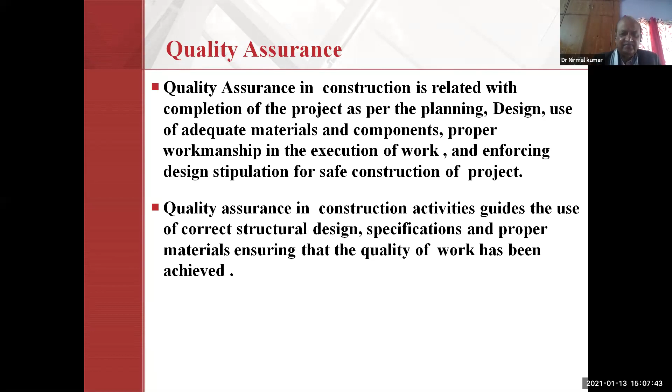Now, workmanship is also a component of this quality assurance, and therefore the role of civil engineers is very important. We are responsible for creating a sustainable world for enhancing the quality of life on this earth. This is our responsibility and our role as civil engineers. We serve society collectively as planners, designers, constructors, and operators for development, creating an environment for the well-being of man and society. Our role is extremely important as it accounts for the overall safety of society in many different facets. Our job is related to making the area safe for the people who live here. We are stewards or leaders of the natural environment and its resources.

We are innovators, integrators of ideas and technology across the public, private, and academic sectors. We are managers of risk and uncertainty caused by natural events like accidents and other natural onslaughts like flood, fire, and earthquake. Our structures should be constructed to sustain all these natural onslaughts to make us safe. We are leaders in discussions and decisions shaping public environment and infrastructure policy.

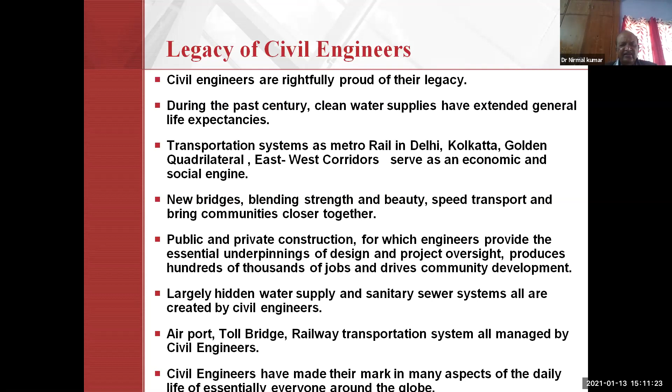In public and private construction, engineers provide the essential underpinning of design and project oversight. We produce hundreds of thousands of jobs due to construction activity. We are also responsible for supplying hidden water supply and sanitation systems, and we have created infrastructure for sanitary and sewer systems. We have constructed airports, toll bridges, and railway transport systems. It is all managed by civil engineers. We have made our mark in many aspects of daily life, essentially touching everyone around the globe.

We have been provided with four types of human endowments: our power of imagination, our conscience, independent will, and self-awareness. All these elements empower us to create structures by planning, analysis, design, and finally construction.

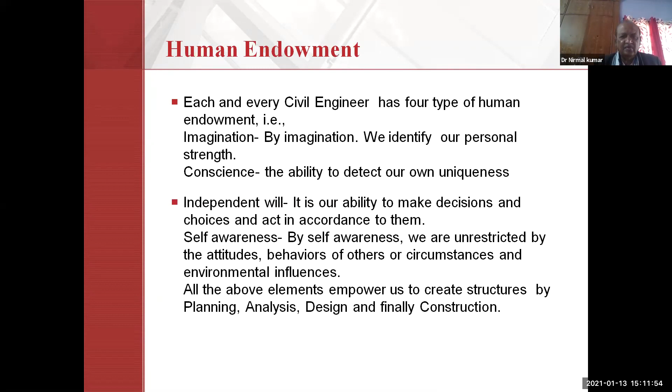Friends, the world around us is changing very fast. We should be prepared to face the world and compete with innovation in the field of civil engineering.

Engineering is all about using insight to conceive, model, and provide an appropriate solution to problems. Engineering knowledge serves as an engine for designing building structures, materials, and services at the lowest overall cost, consistent with performance, reliability, appearance, maintainability, service life, and safety.

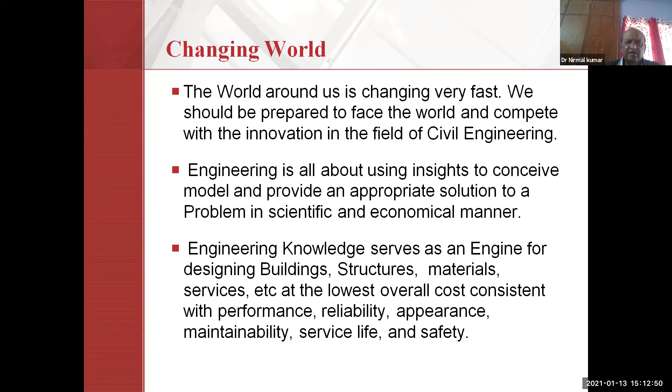Civil engineers should be creative and entrepreneurial. They should be committed to ethics in organizations, curious for continued learning, with a fresh approach and development of new technology or innovative application of existing technology. We should be honest, we should be credible, telling the truth and keeping our word.

We should be optimistic to face challenges and setbacks. We need commitment, planning, persistent flexibility, and the ability to work in a team. We should respect others, colleagues, co-workers, and be tolerant of their rights, values, property, possessions, and sensitivities. We should be self-disciplined in keeping with public health, safety, and welfare implications for most engineering projects, and maintain a high degree of interdependence within project teams and between teams and their stakeholders.

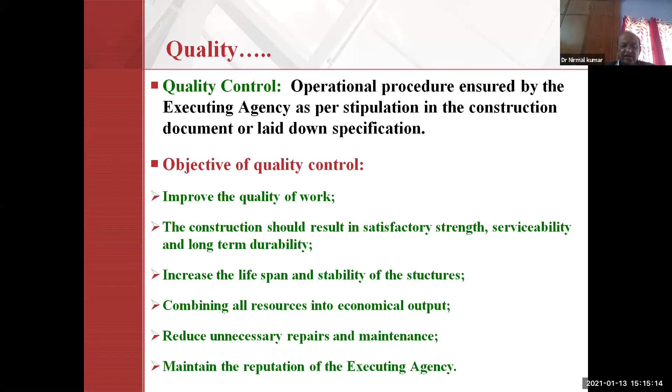We are combining all resources into economical output. We should make structures which are economical. We construct structures that need minimum repairs and maintenance on an annual basis. It should be a robust structure. We are careful about our reputation in executing the work.

What are the causes of poor quality, summarized here? Generally, contractors use weak materials, and there is a lack of workmanship, improper quantity and quality of cement, aggregates, and water.

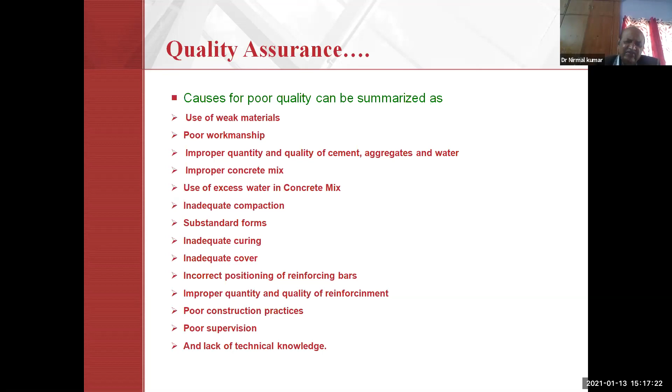This is the scenario everywhere you can see, except in a few reputed organizations like Larsen and Toubro, Gammon, and others. Small-type contractors do this kind of business, using weak materials and lacking workmanship, and you can see it everywhere.

As madam initiated the talk, she talks about the quality strategy. On that point of view, I am focusing on this: we have to create a quality culture everywhere in educational institutions, in constructions, and everywhere in any field, whether it is electronics, computer engineering, or mechanical engineering.

This quality culture will be created by education, training programs, retraining, and promoting awareness about quality of work. We should share information and concern on quality assurance with all stakeholders, communicate ideas about quality of work, carry out quality campaigns in any construction project, and constitute a task force or steering committee for implementation of quality objectives or quality plans. This is the quality strategy everywhere in any field.

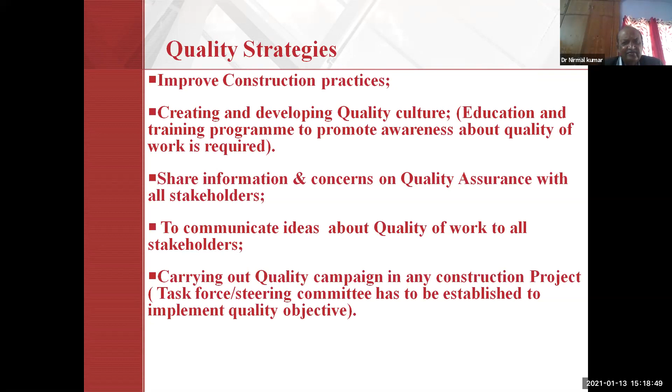In civil engineering, we are totally focused on some critical items: concrete, reinforcing steel, masonry works, waterproofing work, damp proofing course, joinery and timber works, form works, and other services like electrical, sanitary, and water supply work. This is the job role of any civil engineering project.

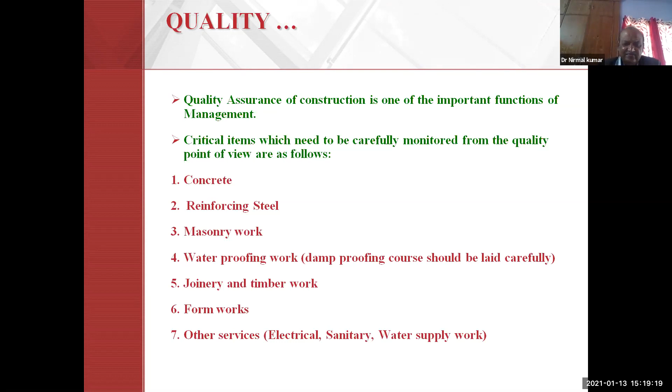Now we should discuss concrete. Concrete is the most versatile construction material at domestic level and commercial level. It is used everywhere for constructing a road, a building, a dam, a water tank.

Steel is also a construction material, wood is also a construction material, but we can't construct a road by steel or by wood. But concrete is used everywhere, whether it is a dam, reservoir, water tank, building, cinema hall, or any commercial structure. Therefore concrete is the most versatile material.

We rely on concrete as it is a safe, strong, and simple building material. It is used in all types of construction, from domestic to multi-story office blocks and shopping complexes. Despite the common usage of concrete, few people are aware of the considerations involved in designing a strong, durable, and high quality concrete, and this lecture is totally focused towards this.

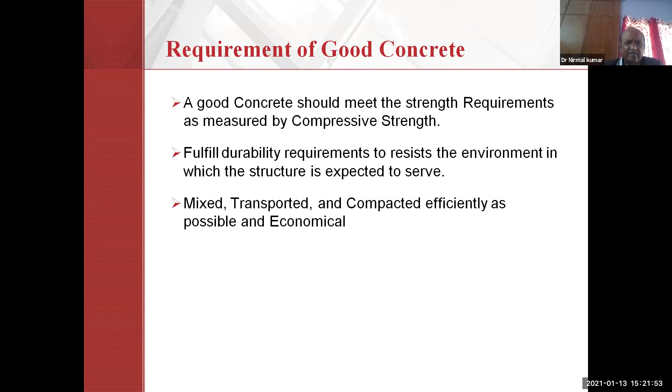Strength we know, but we generally do not think or consider durability as an important aspect of concrete. What is durability? Durability of concrete is the ability of concrete to withstand the harmful effects of the environment to which it will be subjected during its service life, without undergoing deterioration beyond acceptable limits.

Durability can be assured keeping in view the environmental exposure of the structure, certain minimum cement binder content, maximum limit of water cement ratio, and certain minimum grade of concrete for the particular exposure.

Suppose you are constructing an offshore structure in the sea. It is subjected to bad conditions of environment, as the concrete will be subjected to salty water of the sea, and therefore to make it durable you have to select a certain minimum grade of concrete.

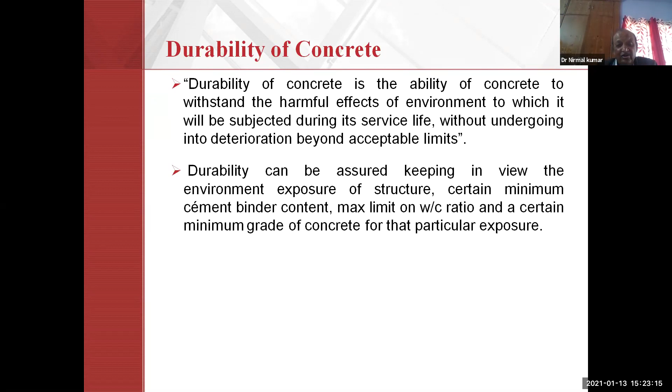To make a durable concrete, we should lower the porosity and permeability of concrete. It is the only way to reduce environmental attack on the concrete. Dense and compacted concrete that prevents the ingress of harmful elements is the key to durable concrete.

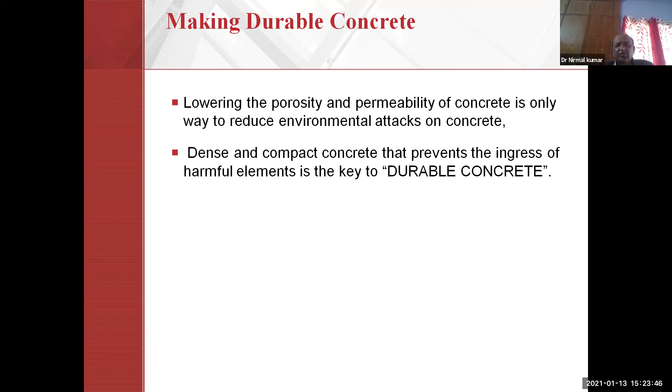What is the durability criteria as stipulated in IS 456/2000? For mild exposure, the minimum cement required for M20 grade of concrete is 220 kg, and the maximum water cement ratio is stipulated as 0.6.

For reinforced concrete, the quantity of cement is more, 300 kg. One side of the table is for plain concrete, another side is for reinforced concrete.

But this is limited only to M20 grade of concrete as stipulated in IS 456. Beyond M20 grade of concrete, we should go for mix design as per the stipulations made in IS code 10262.

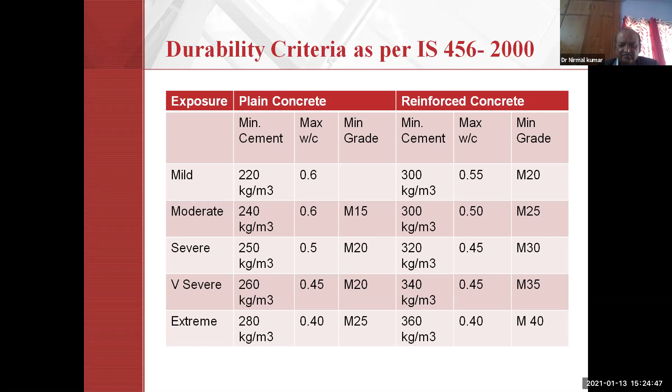Then what is the system approach of making concrete? It should be transported immediately, placed immediately, compacted within a stipulated time, and finished within the stipulated time before hardening of the concrete. And then we are able to make a strong and durable concrete.

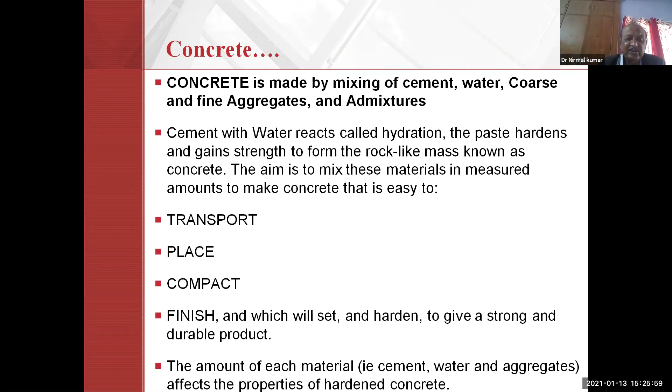The amount of each material component of concrete—cement, water, aggregates, and admixtures—will affect the properties of the hardened concrete, and therefore their selection is very important. In mixing the concrete, we decide the ingredients as per the stipulations in our IS code.

The four main properties of concrete are workability, cohesiveness, strength, and durability, and fresh concrete has three different states. First, freshly mixed concrete remains in a plastic state for a few minutes, then it starts setting, and finally it becomes hardened.

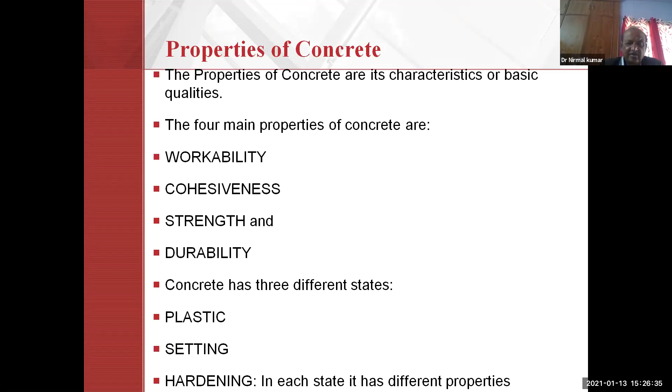Now, what is plastic state? When the concrete is first mixed, fresh, it is like a bread dough.

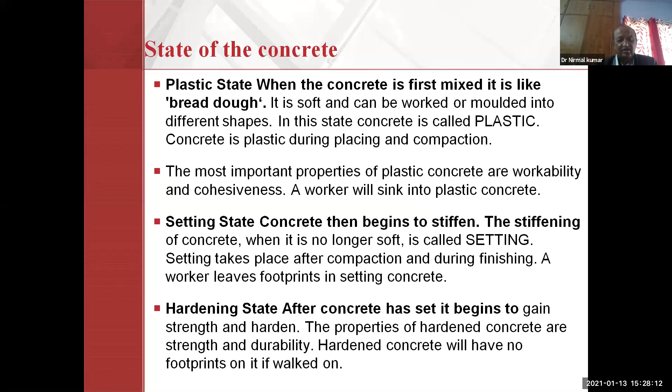The important property of concrete is workability. In a simple sentence, it is defined as the ease with which concrete can be mixed, transported, placed, and compacted. The workability of concrete has also been defined as the amount of work required to place concrete and compact it thoroughly. Workability is associated with four concepts.

Ease of flow means the internal friction should be minimum, and we should make concrete which is able to prevent segregation of the concrete, prevention of harshness, and prevention of bleeding. These are the important issues related to workability of concrete.

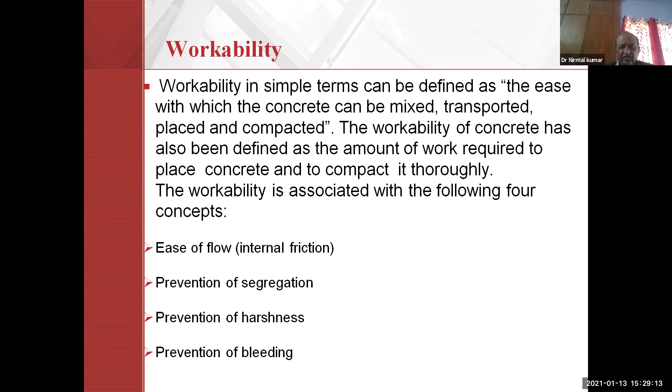To improve workability, it is necessary to reduce internal friction. The internal friction can be reduced by lubrication of the surface of aggregates. The lubrication can be improved in two ways: by increasing the quantity of water in concrete. Greater the quantity of water, more area it can lubricate.

But this method is not good. It is an inefficient method because if water is more, then strength will be less. There is an inverse relation between water-cement ratio and strength. The second way is to reduce the total surface area of the aggregates by adopting coarse aggregate. But coarse aggregate should not be used too much, because there will be lesser area and segregation will take place.

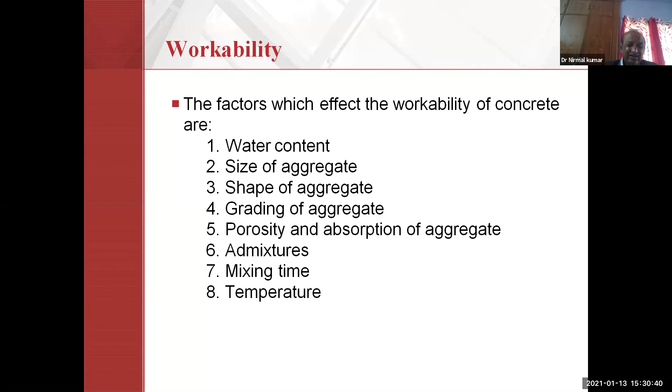The workability of concrete will be affected by water content, size of aggregates, shape of aggregates, grading of aggregates, porosity and absorption of aggregates, admixtures, mixing time, and temperature. All these are factors responsible for affecting the workability of concrete, and care should be taken of all these things in a balanced, consistent way.

Water content: if you add more water, you get less strength and poor durability - low strength and poor durability. Therefore water content will be monitored as per the stipulations made in our IS code.

The size of aggregates will also affect the workability of concrete. If you use larger size aggregates, the surface area available for bonding of the concrete with cement paste will be less, and therefore it will become more workable, but it is not good from the strength point of view. The size of aggregates should always be less than 20 mm. This is the codal provision and it should be strictly followed.

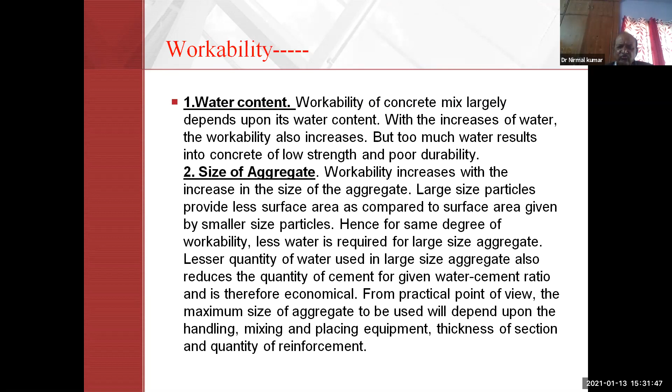Shape of aggregates also affects the quality of the concrete. If the shape of the aggregate is rounded, then less water will be required, and therefore we always prefer to use crushed and angular aggregates, which will also affect the workability, and for lubrication more water will be required. These water requirements may be reduced by adding super plasticizers or air bubbles in the concrete.

Grading of the aggregates: we should make concrete which is properly graded using aggregates of different sizes. Sand is less than 4.75 mm in size, then we use 10 mm down aggregates and 20 mm aggregates. There are three types of aggregates we use for making good concrete, to make it more dense, with less voids, more strength, and a more durable concrete.

Porosity and absorption of aggregates: if the aggregate is porous, non-saturated aggregates will suck water, and therefore it will become harsh. Porous aggregates should also be avoided. Before using the aggregates, we should test them in the laboratory to find the water absorption of that particular grade of aggregate. All care should be taken.

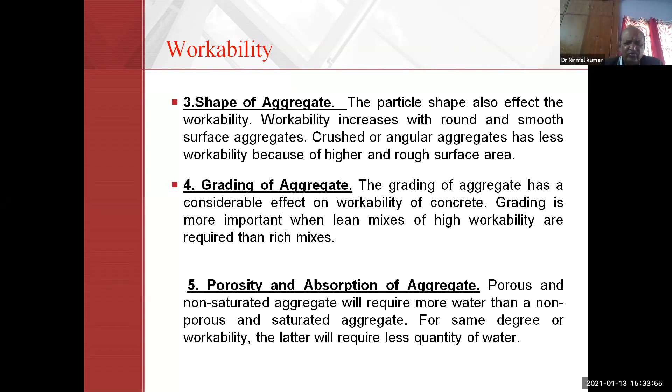Admixtures we use are of different types. One type is injecting air bubbles. Billions of microscopic air cells per cubic foot are injected so that these air pockets relieve internal pressure on the concrete by providing teeny chambers for water. The bubble acts as a cushion between aggregate particles, reducing friction and interlock and allowing a lower water content.

Bleeding and segregation are reduced. The air entraining admixture helps the mix resist segregation. Mixing time as per the stipulations made in IS code should be strictly followed.

The temperature will also affect the workability of the concrete. For example, if you are making concrete, erecting a structure in a cold environment where temperature is less than 0 degree or at 0 degree, workability will be affected. If the temperature is more than 50 degrees, the workability will also be affected.

Therefore in IS code, different types of exposure conditions are mentioned: mild, moderate, severe, very severe, and extreme. These are the conditions as for Jammu and Kashmir, which represents extreme exposure conditions. In Rajasthan, in summer season, the environmental conditions are also harsh and extreme. For these extreme conditions, the water cement ratio and the quantity of cement are all prescribed in our Bureau of Indian Standard codes.

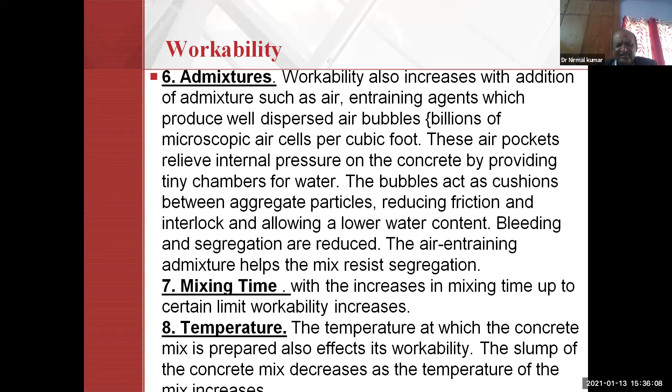Workability may be measured by slump test, compacting factor test, and VeeBee consistometer test. All students and teachers are acquainted with this, and the very simple apparatus for making a slump test is a frustum of cone, where the diameter at the bottom is 200 mm, top diameter is 100 mm, and height is 300 mm.

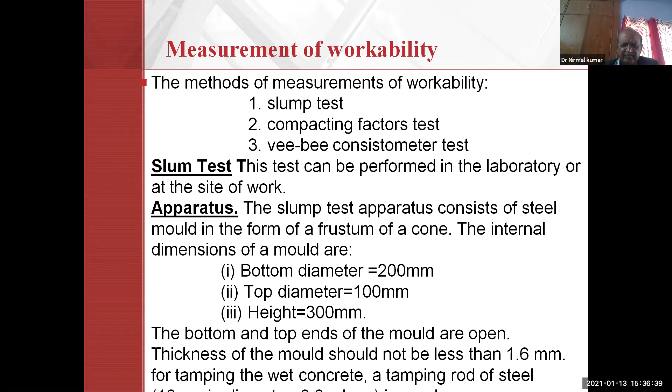Now we are coming to the segregation of concrete. The segregation of coarse aggregate from concrete mix in plastic stage is called segregation. Separation of coarse aggregate from the cement paste is known as segregation. Concrete is not a homogeneous material but rather a mixture of materials of different specific gravity.

There is a tendency for coarser and heavier particles to settle down and lighter material to rise to the surface. Segregation reduces the strength and durability. Suppose you are using a porous aggregate whose density is less, then it is bound to cause separation of that particular grade of aggregate whose specific gravity is less. Therefore we should maintain balance to avoid segregation of the aggregates from the cement paste.

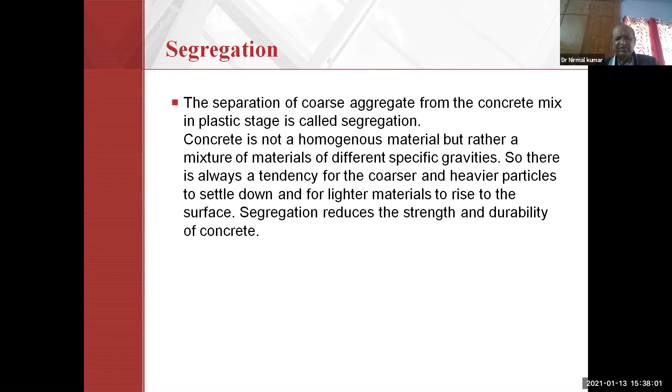The causes of segregation: there is too much water in the mix, there are badly graded aggregates, there is too much shock to the concrete mix due to transportation over a longer distance, discharge of concrete from a considerable height of more than 1 meter, pumping of concrete, leakage of mortar from formwork, and concreting done underwater. These are the possible causes of segregation, and we have to take care of all these issues from the quality point of view.

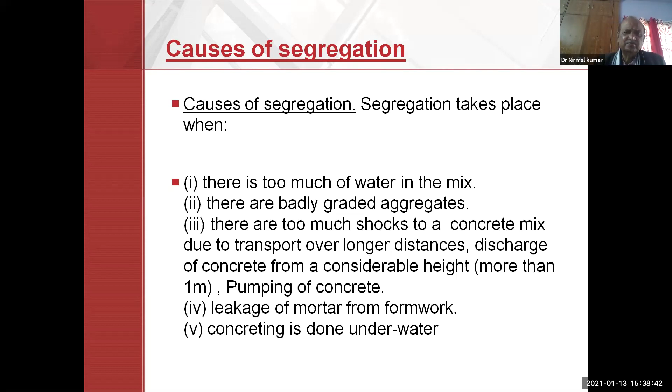How will segregation be prevented? The mix should be designed correctly. Minimum amount of water should be used for mixing. The height of free fall of concrete should not exceed 1 meter in any case. Air entraining agents should be used for reducing segregation as these reduce the quantity of mixing water.

What is bleeding now? Bleeding means the appearance of water along with some particles of cement and very fine sand on the surface of freshly placed concrete after compaction. A good concrete should be free from bleeding. The term water gain is also sometimes used instead of bleeding, when water rises to the surface.

It means you are adding water more than the required amount, more than the stipulations made in IS code. Therefore, concrete with a large amount of bleeding is permeable. Due to bleeding, a watery scum of fine sand and cement particles is formed on the concrete surface, and it should be avoided.

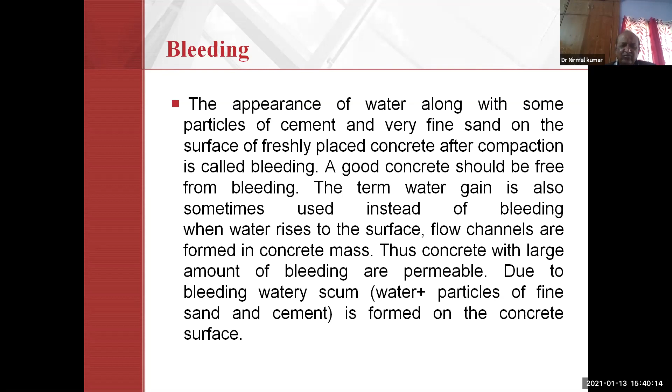Causes of bleeding: presence of excess water, deficiency of fine aggregate, and too much finishing. This bleeding may be prevented by controlling the water cement ratio, providing finer grades of fine aggregate as per the stipulations made in IS code, using finely ground cement, controlling compaction, and air entraining agents should be used to prevent bleeding.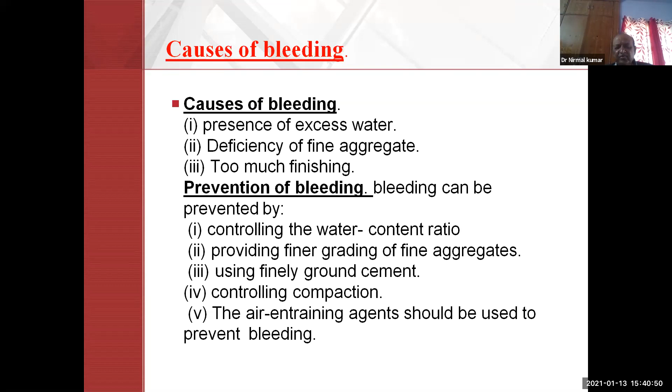Segregation of aggregates from the...

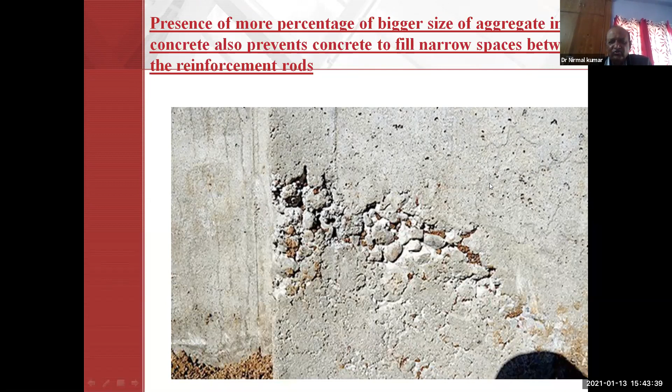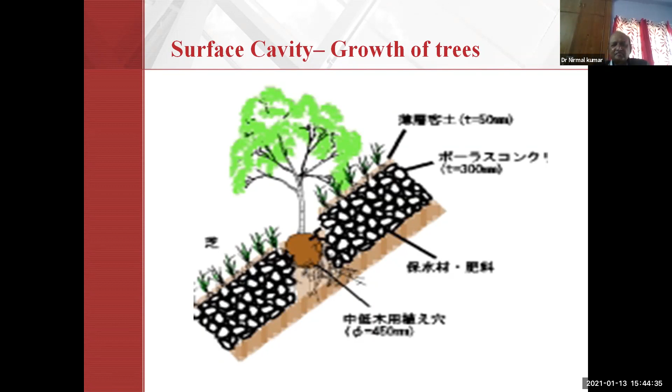Then what will be the remedies for honeycomb in concrete? It may be repaired. The concrete should be broken and that portion should be concreted after applying grouting chemicals. There are different types of chemicals available in the market and it may be grouted. The old surface will be grouted.

Honeycombs as a defect not only reduce the load bearing capacity of the structure. Also, water will find an easy way to the reinforcing rods, and if water comes into contact with the reinforcing rod, the steel will become rusted, corrosion starts, and corrosion continues through reinforcement rods even in good concrete. This results in losing grip between rods and concrete, which is very dangerous to safety and life of the concrete structure. The whole structure will come down.

The RCC structures will fail within 20 or 30 years of their construction, which is less than half of their projected life. In case of honeycomb on surface, pressure grouting with cement-based chemicals, which are non-shrinkable, can be used to repair the honeycombing.

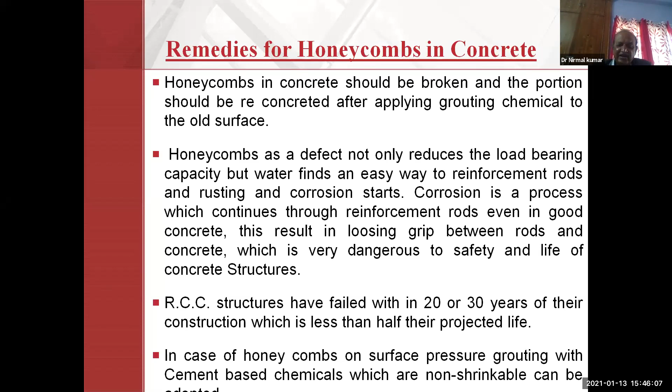Therefore, for making good quality concrete, first of all, the important point based on our discussions is that we should make proper proportioning of the ingredients, which is water, cement, fine sand, coarse aggregate of 10 mm, coarse aggregate of less than 20 mm, and admixtures. It should be properly proportioned.

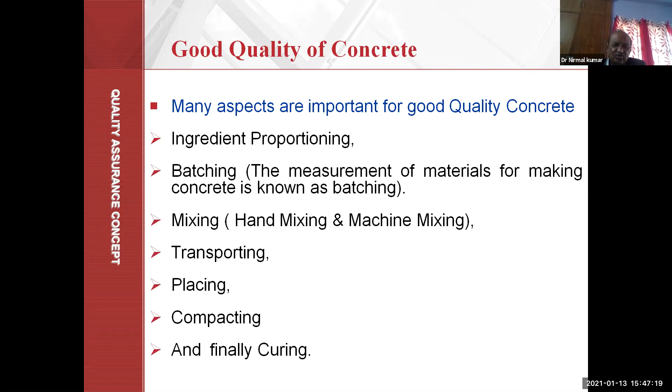And it should then go through batching and mixing. Mixing may be done by hand mixing and machine mixing. After mixing, it should be immediately transported to the specified place, and it will be compacted, and finally curing is required to complete the reactions of water with the cement.

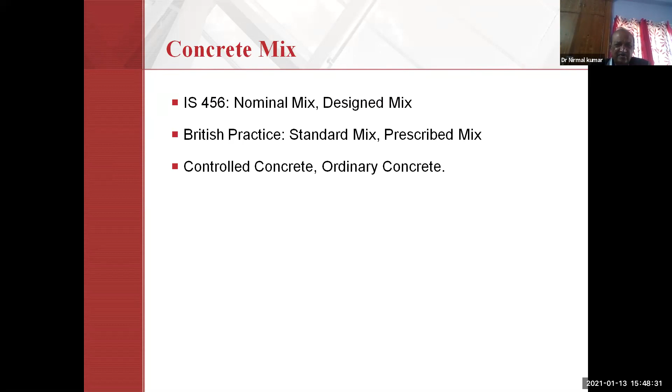A table for nominal concrete mix is given in the IS code. For concrete less than M20 grade, in table number 9, page 23, you can see it in the IS code, which I have reproduced here for M20, M15 and M10 grade, in which per bag of cement, water requirement is 30 kg, 32 kg and 34 kg respectively for M20, M15 and M10. And water cement ratio will be limited to 0.6, 0.64 and 0.68. Coarse aggregate weight is also given, along with fine aggregates. But beyond M20 grade of concrete, you should go for mix design.

Now we should come to the hand mixing practice. Hand mixing practice is generally used in rural areas where you require cement more than the stipulations, by an amount of 10%, and you end up producing an inferior concrete. Therefore, we should go for machine mixing. But we can improve the quality if we properly mix the ingredients in a systematic way.

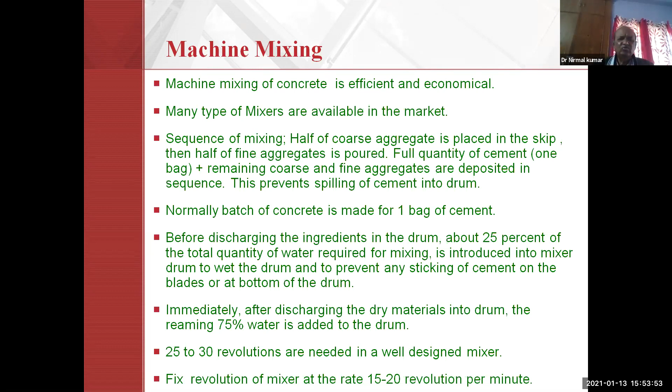Now, an important ingredient of concrete is cement, and it reacts with water to form calcium silicate hydrate gel. Therefore, selection of good quality cement is also essential.

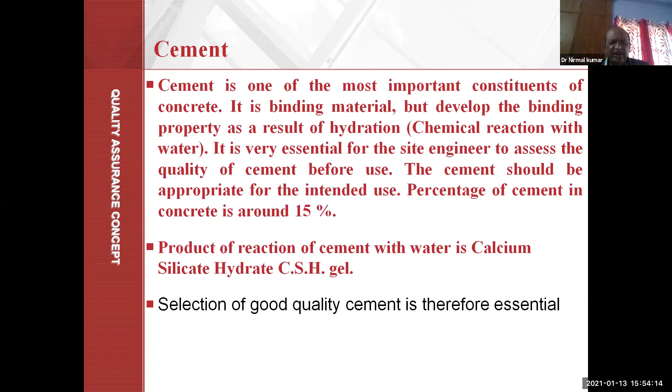There are different brands of cement available in the market. An important brand is OPC, ordinary Portland cement, and it is available in 3 types of grades: 33 grade, 43 grade, and 53 grade. 33 means the strength of the cement is 33 megapascals after 28 days. 43 means strength is 43 megapascals. 53 means strength is 53 megapascals, after mixing with cement and sand paste.

Another popular type of cement is Portland Pozzolana cement, PPC, as per the stipulations made in IS 1489, which is fly ash based cement. Another type is Portland slag cement. No grading is specified in PPC and PSC, but it is suitable for all types of construction. It is particularly useful for marine structures, PSC. No grade is specified, but generally PPC will have 31 megapascal strength, and similar is the strength for Portland slag cement.

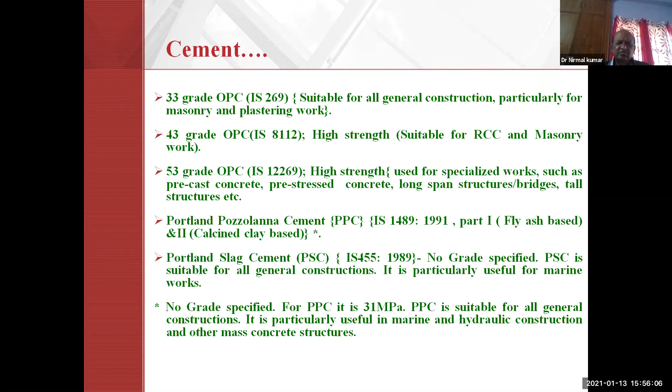Now, for field engineers or civil engineers, without laboratory testing, how can cement be identified as good or bad cement, by physical observation?

First of all, we should check the manufacturing date printed on the cement bag, and we should also check whether the ISI logo is printed on the bag or not. On the cement bag, the year and month of manufacturing is mentioned, from which we can see how old the cement bag is.

And by opening a cement bag, we should see the color of the cement, which should be greenish gray. We should also check whether there are small lumps visible or not.

We can also check the cement by thrusting our hand into the cement bag. If it gives us a cool feeling, then it is good cement. We can take a small amount of cement between finger and thumb, and if we feel a smooth feeling, then we can say it is good cement.

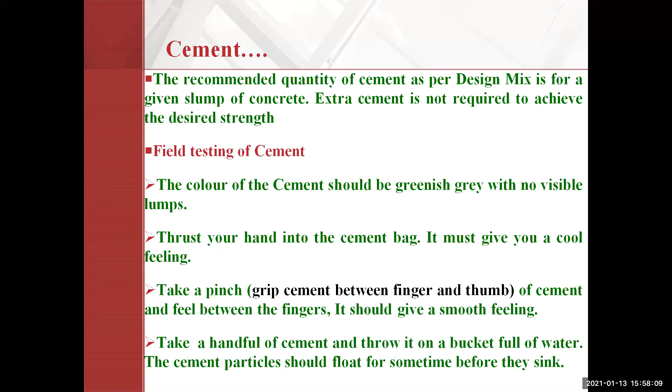Again, you can take a small amount of cement, a handful, and throw it in a bucket full of water. The cement particles should float for some time, and then settle or sink. Then we can say it is good cement. But if there is a visible lump and you throw it, it will immediately go down. Then it is bad cement, not good cement.

This is the quality issue.

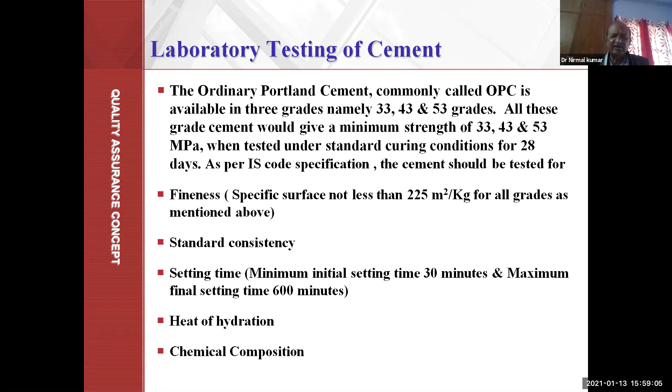The storing godown must be provided at the site, and cement should not be stored for more than 3 weeks prior to consumption. Any cement in the godown which is already lumped must be rejected and removed from the site. The cement meant for construction must be tested for its physical properties prior to consumption. In the absence of a test certificate, usage of such cement will not be permitted.

Now we see, if cement is fresh, then strength will be 100%. If it is 3 months old, strength will be reduced by 20%. If it has more than 6 months storage, strength will be reduced by 30%. If it is 1 year old, strength will be reduced by 41%. And if it is 2 years old, strength will be reduced by 50%.

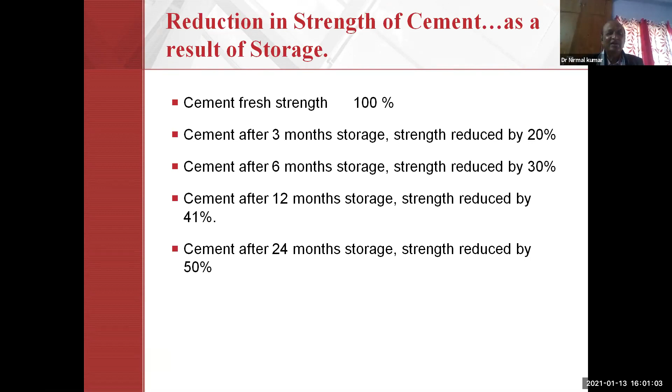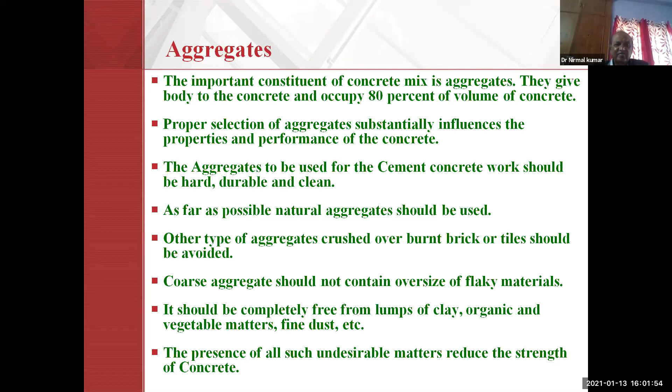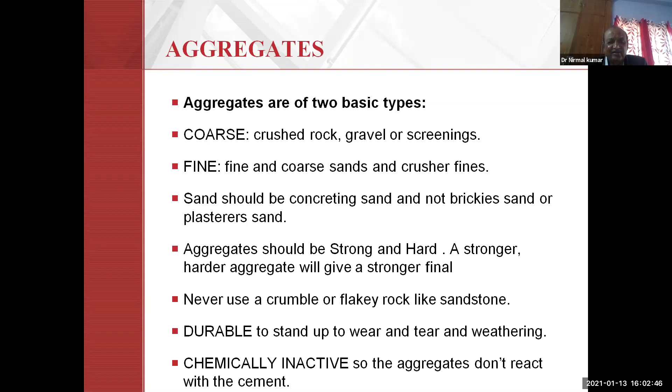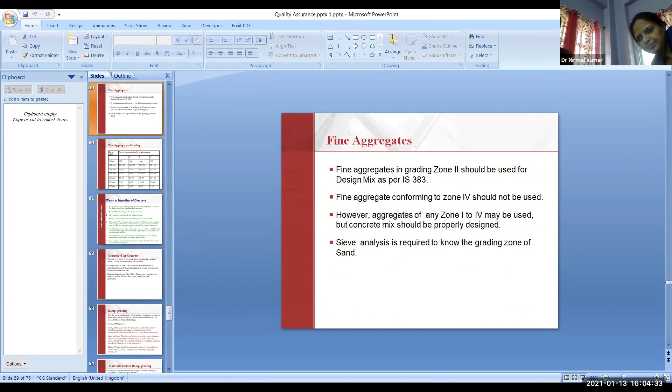Now it is visible. Yes, yes, sir. Now it's visible, sir. Yes, you can continue, sir.

Now I am discussing aggregates. In this slide, for all practical purposes, in RCC work, the aggregate size is limited to 20 mm. Generally the preferable size is less than 20 mm, which will develop greater strength and is considered satisfactory. Larger the maximum size of aggregates, lesser surface area for bonding with mortar will be available, and this will result in lesser compressive strength. This is a very important point for each and every one.

The specific gravity, density, void and absorption properties should be known prior to use, as per the stipulations made in IS 2386 Part 3. It should be tested in the laboratory. Sieve analysis is an important parameter for checking the size of the aggregates, and therefore it should be performed in the laboratory. Mechanical properties of the aggregate should be tested for crushing, impact, and abrasion. This is an important aspect for aggregate quality assurance.

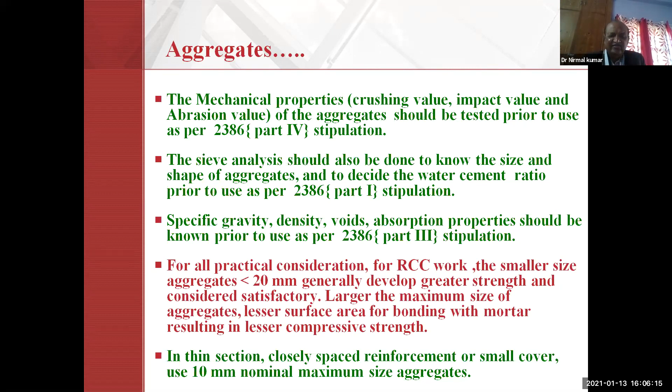Now aggregates - this is the coarse aggregate. As per IS code stipulations 383, page number 9, table 2, this is the criteria for passing of aggregates through different sizes of sieves.

For graded coarse aggregate, 95 to 100% of 20 mm aggregate should pass through the 20 mm sieve, meaning only 5% oversize beyond 20 mm is permissible as per the stipulations made in IS 383. From the 10 mm sieve, 25 to 55% should pass - this is the limit, this is the stipulation. And below 4.75 mm, only 0 to 10% should pass. Whatever is below 4.75 mm is considered fine aggregate. This is the criteria in IS code 383.

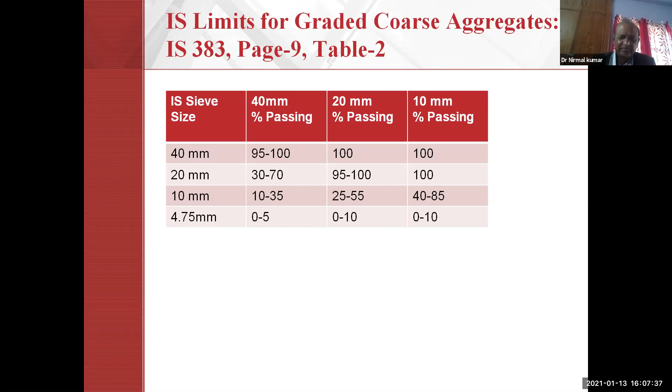For aggregates, the crushing value is allowed up to 30%. In each case, impact value is 30%, abrasion is 30%, for the wearing surface like roads etc. Other than the wearing surface, crushing value is allowed up to 45%. Impact value is also allowed up to 45%. And abrasion value is allowed up to 50%.

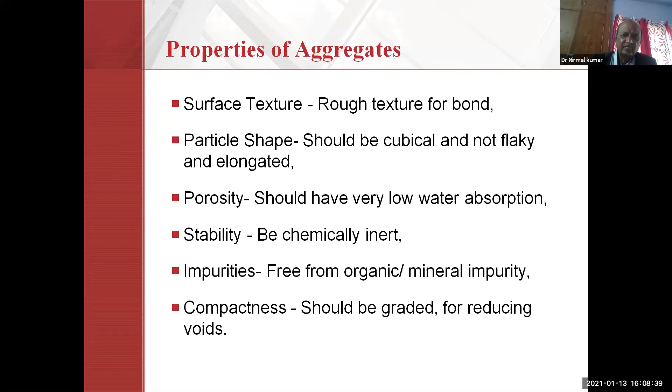Now fine aggregates. Fine aggregates are segregated into different compartments from zone 1 to 4. Sieve analysis is required to ascertain which zone of sand this particular sand falls into. There are IS stipulations in code 383 for zones 1, 2, 3, 4 - we pass it through 10 mm sieve analysis, and this is the criteria and limitations of passing of aggregates through different sizes. Then we can say whether it is fine sand or coarse sand. All sands pass through the 10 mm sieve at 100%.

4.75 mm से जोन 1 का 90 to 100%, जोन 2 का भी 90 to 100%, और जोन 3 और 4 95 to 100% करता है। तो जोन 1 सबसे कोर्स सैंड है, जोन 2 मिडिल में है, जोन 3 फाइनर है और जोन 4 और भी फाइनर है। जनरली जोन 1 और जोन 4 को अवॉइड करते हैं फॉर मेकिंग अ गुड क्वालिटी कंक्रीट। जोन 2 और जोन 3 is preferable.

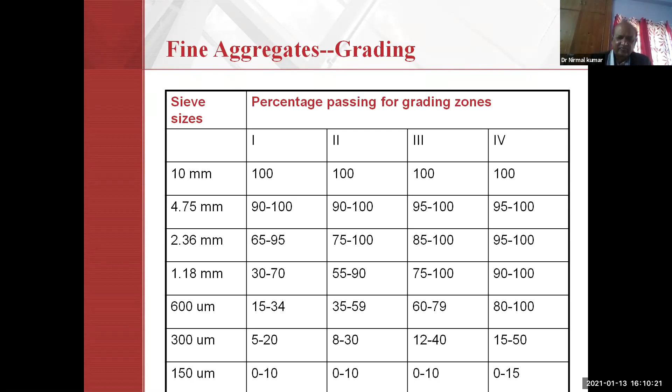Now the next ingredient for making concrete is water, and water fit for drinking is also fit for concrete. The pH value of water should not be less than 6. Physical and chemical tests should be done as per the stipulations made in IS 3025. All the parameters of drinking water should be tested, which is also used for making a good concrete and used for curing also.

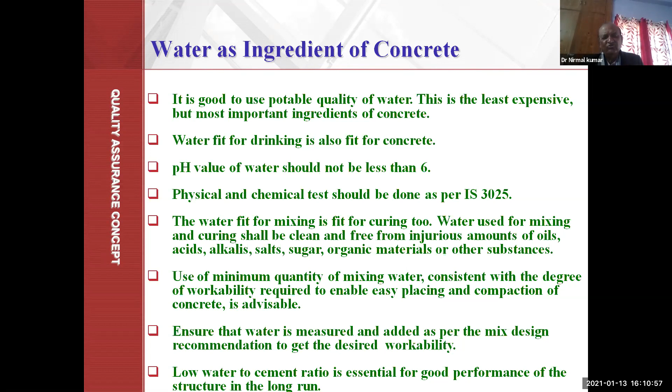Now, what is the criteria for measuring the strength of concrete? We prepare a standard size cube of 150 into 150 into 150 mm, and if it is cured continuously for 28 days, the strength is tested for that particular grade of concrete. M20 means the mix should achieve 20 megapascal strength - if it is not achieved, it is rejected. This is the criteria, and the cube is the standard specimen in India.

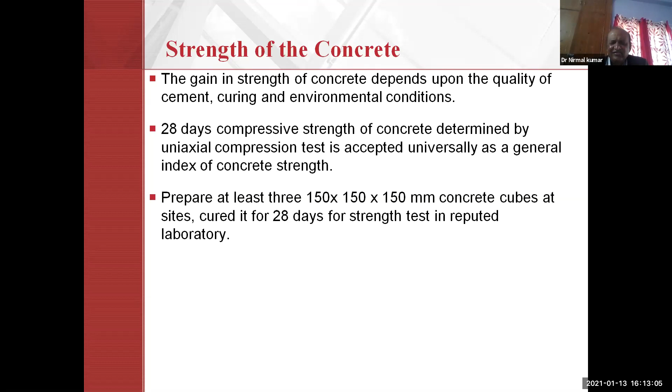But in USA and Great Britain, the cylinder is the standard specimen, and cylindrical strength is more true compared to cube strength, because in the cube, friction force is induced between the platen of the compression testing machine and the surface of the concrete. In cylindrical specimens, a uniaxial state of stress is induced, but in the cube, due to size limitations, the whole 150 mm concrete is subjected to triaxial state of stress, and therefore it gives more strength than the cylinder. Cylindrical strength is only 80% of cube strength, and therefore cylindrical strength is more true.

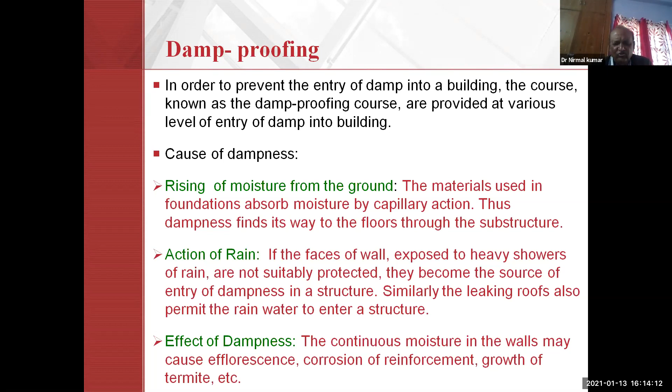Now an important aspect to maintain quality is dampness. There is capillary rise of groundwater into walls, and we should prevent this capillary rise from the ground, as well as the action of rain on exposed surfaces of walls - these are possible causes of dampness in a house. Rainwater entry and capillary rise will continuously moisten the wall of the house, which causes efflorescence, corrosion of reinforcement, and growth of termites, and therefore it should be avoided.

There are different materials available in the market for preventing dampness. One is hot bituminous felts, available nowadays. Metal sheet is also used, and cement mortar 1:3 may be used to prevent capillary rise. Cement concrete at different levels - foundation level and plinth level - is also provided, of M15 grade, which will also prevent capillary rise. Waterproofing compounds will be added, like Pudlo, Impermo, etc., available in powder form. They are mixed with cement by hand before the cement is mixed with aggregate, at 1 kg per bag of cement. This Impermo and Pudlo will be used.

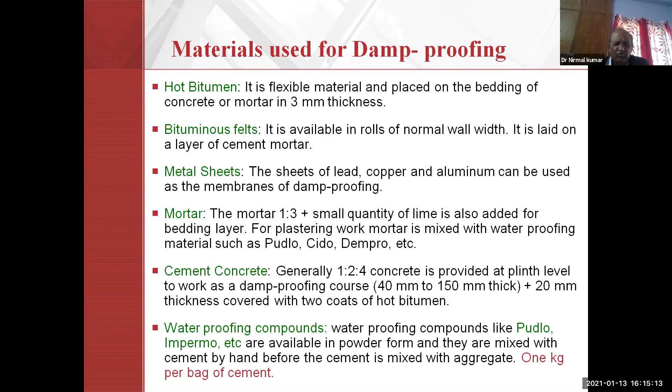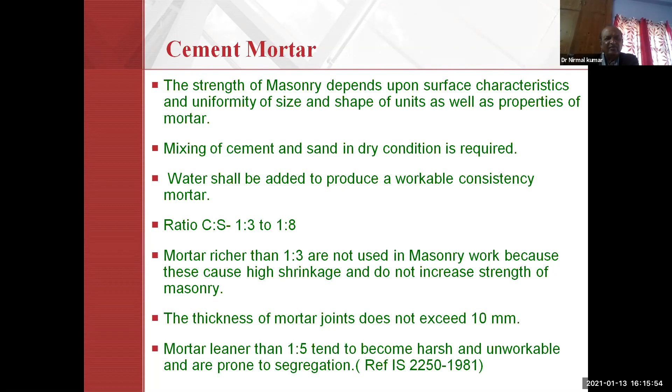Another issue for masonry work is the cement mortar. The cement mortar ratio is limited from 1:3 to 1:8, meaning 1 bag of cement requires 3 bags of sand at the lower limit, and the upper limit is 1:8, meaning 1 bag cement to 8 bags of sand. For masonry work this should be monitored, and the mortar should be well prepared - if it is not well prepared, it will lead to bad quality masonry work.

Now an important ingredient is reinforcement quality - steel bars. Reinforcement is important; it plays a vital role in ensuring the safety, integrity, and durability of almost all concrete structures. A detailed drawing and working drawing is prepared by engineers, and the designers mention all the information on the drawing sheet.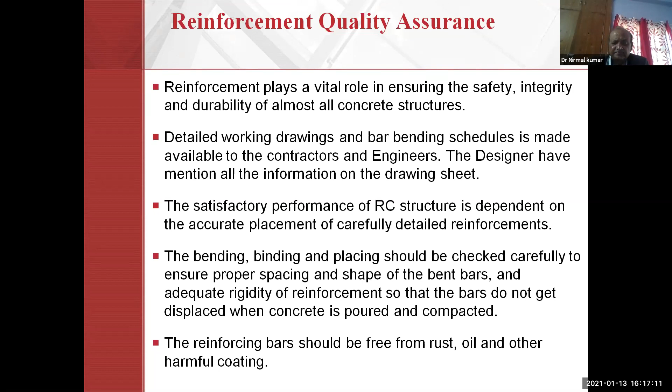The strength of RC structures depends upon the accurate placement of carefully detailed reinforcement. This is a very important aspect - bending, binding, and placing should be checked carefully to ensure proper spacing and shape of the bent bars, and adequate rigidity of reinforcement so that the bars do not get displaced when concrete is poured and compacted. The reinforcing bar should be free from rust, oil, and other harmful coating. We should check the number of bars, type of steel, diameter of bars, and spacing of bars. The reinforcement should be accurately fabricated and assembled, and necessary control should be exercised by contractors and engineers to achieve this objective.

And now, an important aspect is formwork. The shape and surface finish depends upon the formwork, and it should be strong to support wet concrete and have a smooth surface to prevent loss of slurry from the concrete.

A formwork should be well oiled before placement of reinforcement, not after. Pieces of stone or broken concrete are placed between the steel and oiled surface so that the formwork and steel do not come into contact with each other. All rubbish, including sawdust, should be removed from the interior of the forms, cleaned and well watered before placement of concrete.

For support, both steel pipes and timber balli are permitted. Thin, deteriorated, and non-vertical balli will not be permitted at the site. Timber balli should always be vertical and never in an inclined position. Any scaffolding shall only be on hard ground, not on soft soil.

This is about the formwork, and do you know, you will be surprised, the cost of formwork is 40% of the total cost of any structure. It is that costly, and it should not be neglected.

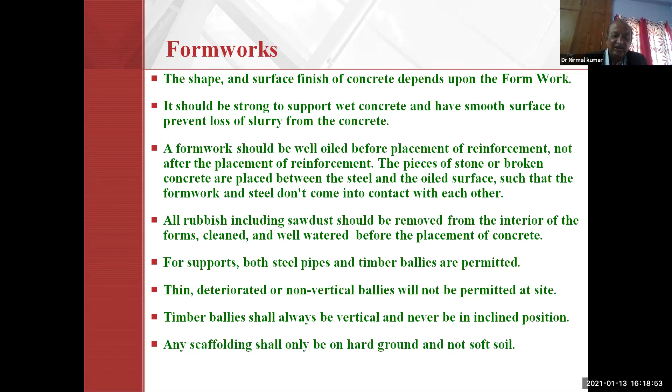Centering shall either be steel shuttering or plywood shuttering or timber planks of adequate width. Distorted, broken, irregular, small size timber pieces are not permitted at site for centering.

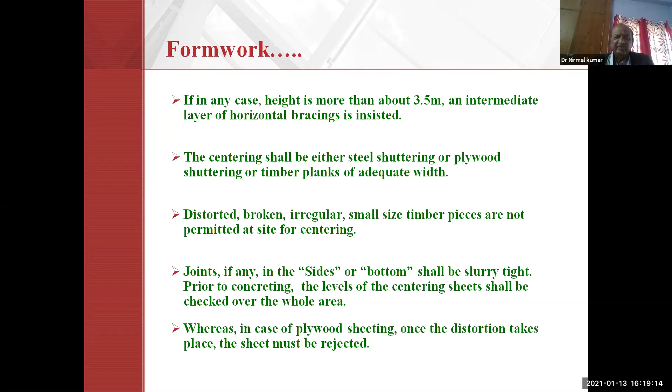This is about formwork, and now the stripping time of formwork from the quality point of view. Vertical formwork to columns, walls, and vertical sides of beams should be stripped within 16 to 24 hours or up to 48 hours.

Slab spanning up to 4.5 meters should be stripped within 7 days. Slab spanning over 4.5 meters should be stripped within 14 days. Beams and arches spanning up to 6 meters or more than 6 meters have a time limit of 14 to 21 days.

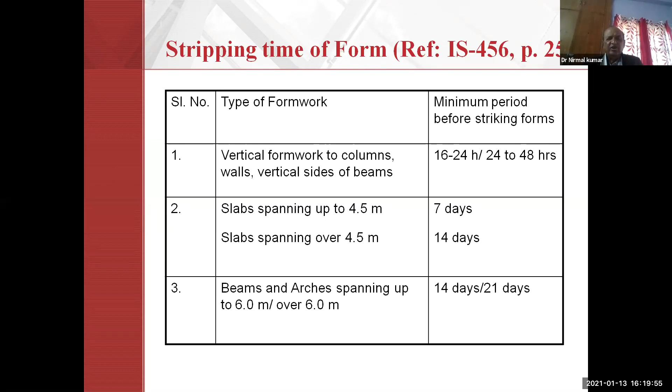Now the important issue related to compaction of concrete: it should be placed and immediately compacted by means of mechanical vibrators. If voids are present, 5% voids reduce the strength by about 30%, and 10% voids reduce the strength by over 50%.

There is an inverse relation between strength and porosity. Compaction eliminates air bubbles and brings enough fine material both to the surface and against the forms to produce the desired finish. Mechanical vibrators will be used.

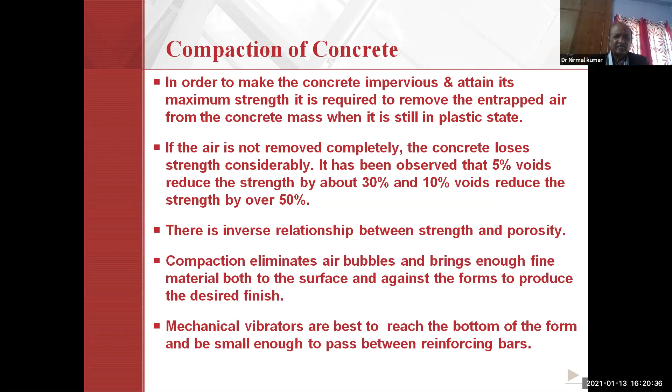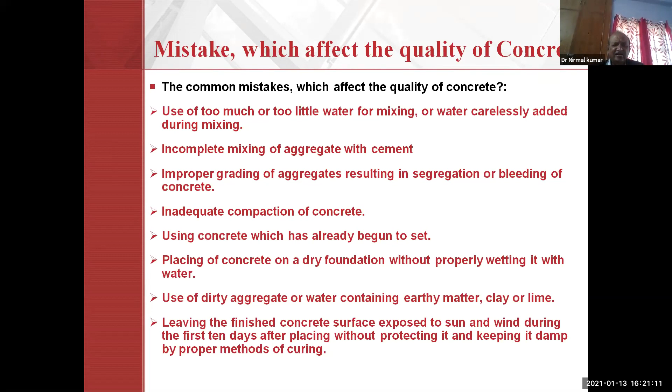Mistakes in monitoring of the quality plan include: use of too much or too little water for mixing, incomplete mixing of aggregate with cement, improper grading of aggregates resulting in segregation or bleeding of concrete, inadequate compaction of concrete, using concrete which has already begun to set, placing concrete on dry foundations, use of dirty aggregates or water containing earthy matter, and leaving the finished concrete surface exposed to sun and wind.

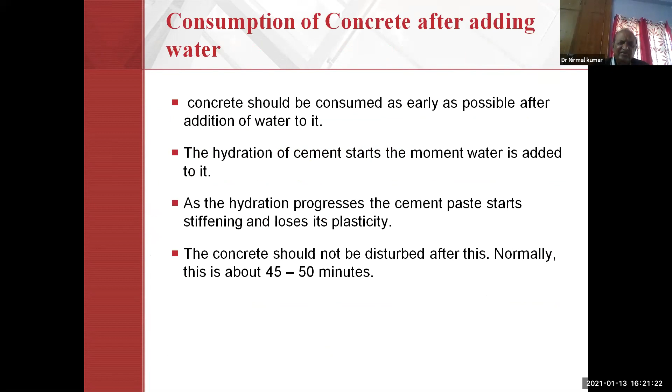And as I told you earlier, it should be placed immediately, as early as possible.

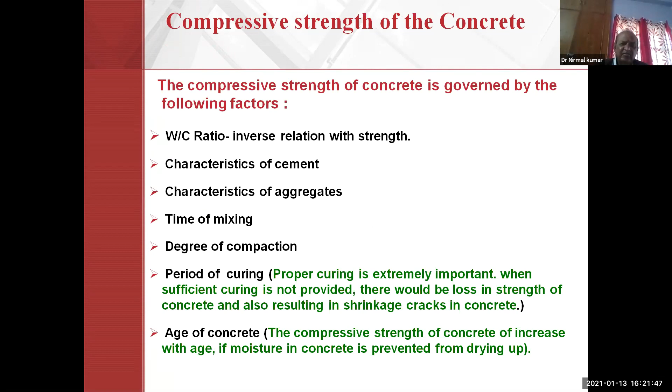Compressive strength of concrete is governed by the water-cement ratio, an inverse relation between water and strength, characteristics of cement, characteristics of aggregates, time of mixing, degree of compaction, period of curing, and age of concrete. It is all about the quality parameters. Thank you very much.